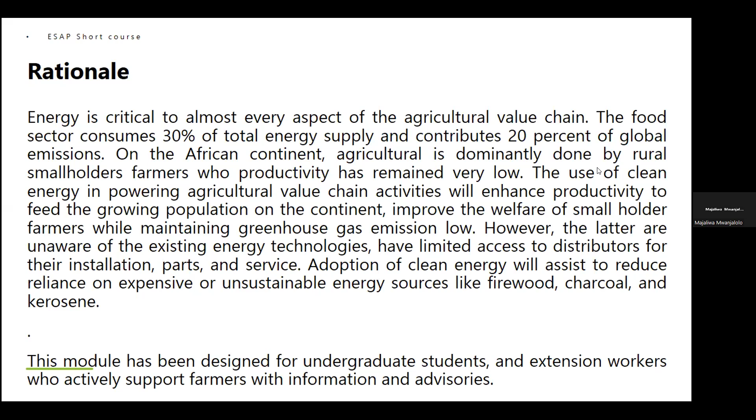undergraduate students, but also an extension workers who actively support farmers with information and advisories. So this particular training is supposed to assist people who are going to be trainers of undergraduate students, but also the extension, but also for those who want to learn some few things about clean energy.

So the goal is to impact microeconomies and rural communities through promotion of cost-effective clean energy options for agricultural value chain productivity. So we have 3 learning outcomes.

One is competencies in analyzing energy options in order to support farmers' decision on powering agricultural activities such as irrigation, greenhouse conditioning, food and feed processing and preservation, but also apply fundamentals, knowledge on energy generation, but also design, construct, and operationalize powering system on agricultural farm. So those are the three learning outcomes for this particular course.

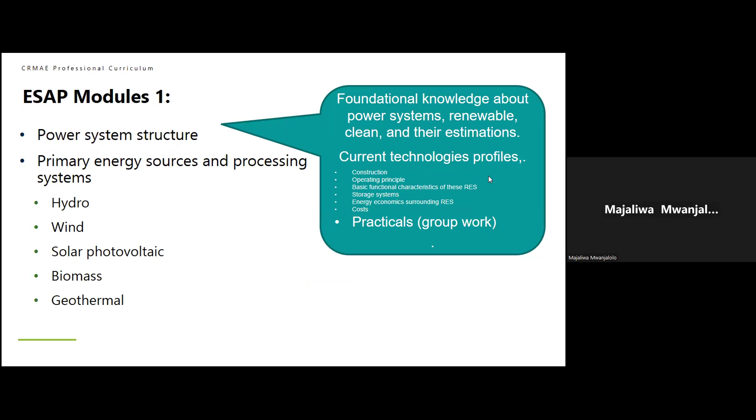So we have 5 modules under this course. The first one, module 1, will talk about power system structure, primary energy sources and processing systems, where we'll get hydropower, wind energy, solar energy, biomass, and geothermal energy.

This, in terms of competencies, we are looking at people mastering the clean energy concept, but also be able to estimate the potential of existing clean energy. In terms of mode of delivery, we are looking at lectures, field visit, and video materials for people who are going to be teaching this course.

Under module 2 on clean energy option for agricultural value chain, we'll discuss issues of inputs, production, local transport, collection, storage, handling, value-added processing, transport, logistics, and marketing and distribution, and end users. But in terms of competences, we are looking at capacity to select the best energy option in the different agricultural value chain. And in terms of mode of delivery, the teachers should be able to use lectures, field visit, and video materials.

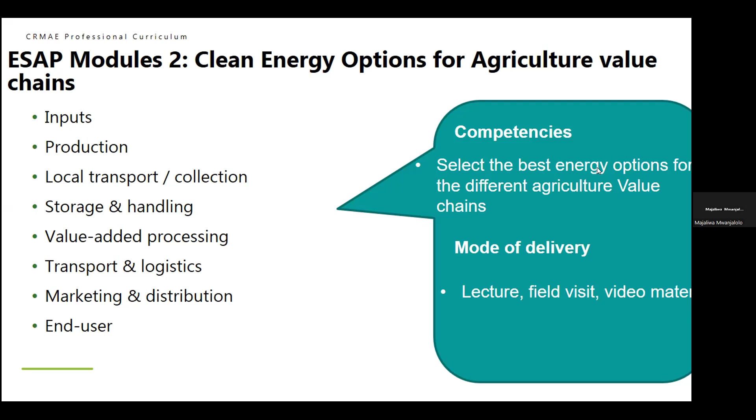In terms of module 3, which look at the energy conversion devices, we are looking at 2 particular options, they say 3: one on from one form of energy into electricity, but also for direct to alternating current, but also from alternating to direct current. But in terms of competences, again, we are looking at people who will be able to select the best conversion devices on the market, and the mode of delivery should be lectures and video materials.

Module 4 is on design and maintenance of these clean energy systems. So under this, we will discuss the design of selected power generation system, basically hydro, solar, wind, biomass, and geothermal, and biogas, but also construction of biogas system and operation principles, then storage, and then maintenance of selected clean energy on agricultural farm.

So in terms of competences, we are looking at capacity to construct selected agricultural value chain energy generation system, maintenance, how to maintain the selected agricultural value clean energy generation system, and in terms of mode of delivery, we are looking at lectures, video materials, and lab practicals.

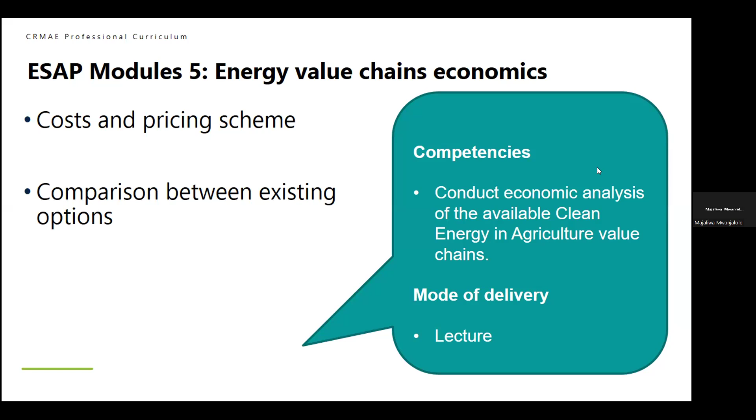In terms of delivery, we are looking at lectures. This course, if taken fully, should last 2 to 3 months. Introduction to clean energy could take 10 hours, clean energy for agricultural value chain 20 hours, energy conversion devices 5 hours, design, construction, operation and maintenance of energy generation systems in agricultural value chain 30 hours, and agricultural energy in value chain economics 10 hours.

So you observe that we have put emphasis on both the fundamentals and the practical aspect, because those two will take 50 hours out of the 75 hours this course is supposed to take.

In terms of assessment, we are looking at written tests and practical outputs for the design, construction, operation and maintenance of energy generation systems. All the rest is basically written tests.

In terms of days, we have planned that the introduction, which I'm doing, and module 1 would take 1 day, we'll see how it moves. Then energy conversion system will take day 2. The third day, the third topic will be on design, construction, operation and maintenance of energy generation systems. The fourth day will focus on the economics.

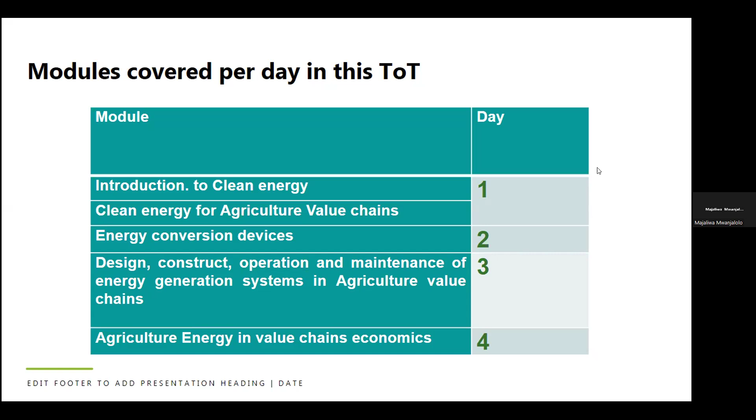We are 2 people to conduct this module: myself, Majaliwa, and my colleague Kacho Karume. I will start with clean energy and go up to the fundamentals for hydro, and then I will leave my colleague Karume to move to the next.

As I said before, the energy systems we have across the world have been designed in a conventional way as centralized power generation systems. So up to the 90s we had big plants to generate a lot of energy, frequently based either on fossil fuel or on hydropower, dispatching this energy to consumers based on relatively inflexible schedules.

But this required fundamental changes if we look at the environmental conditions created by some of these structures. Currently we need to reduce carbon dioxide emissions, and particularly the use of fossil fuel becomes an issue.

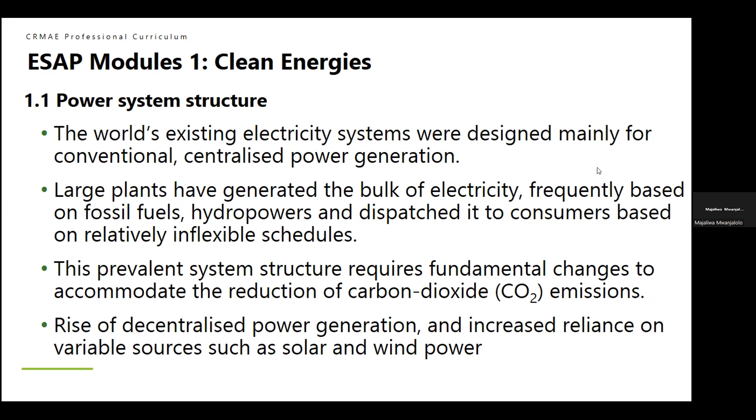As we advance into transition, under the current power system structure to the future power system structure, we need not only to identify mechanisms, but also to implement them by integrating more renewable energy generation systems. Most of the structure before were not integrating some of these renewable power systems, and they presented at that time some limitations, but some of those limitations have been resolved over time.

So we have this current power system, and we want to move into a transition. The transition means we are going into a decentralized, bidirectional system. In one case, if the barrier is still maintained, then we'll basically go into failure. But if we are looking at integration in terms of synergies, then we are likely to be more successful.

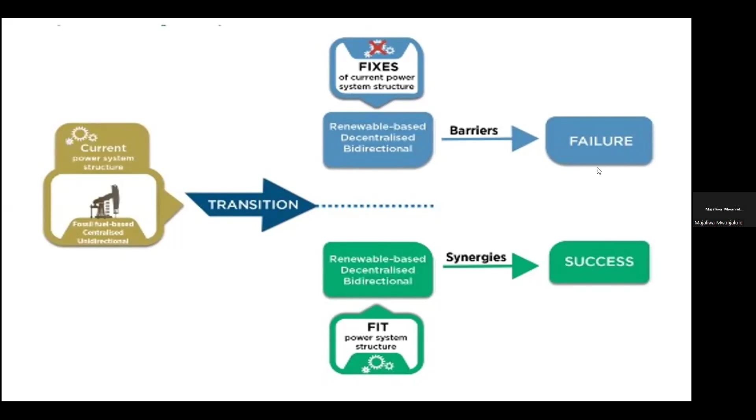If we look at the evolution of power system structure, determinants of energy systems have evolved through economics. People are looking at the economics, at the comfort the system brings. But currently it's not only economics, it's the earth system itself, it's the society people are looking at—not only the comfort people will get, but also the environmental effect of this energy system, and the availability of the system.

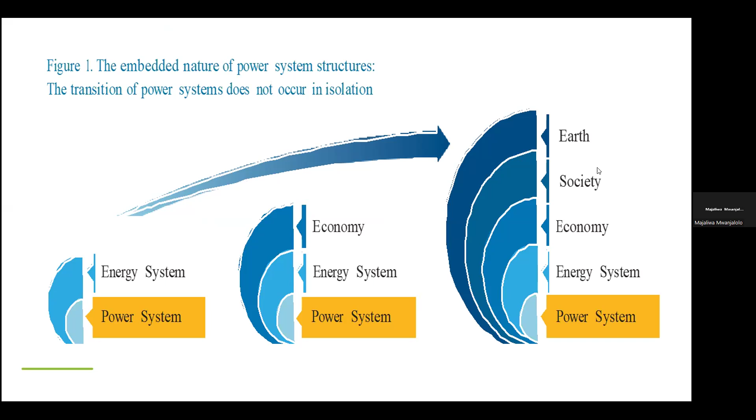So as someone teaching this course, he needs to emphasize two aspects: one, the issue of primary energy, but also the issue of secondary energy.

Primary energy, the way it is defined, is basically an energy form found in nature that has not been subjected to any human engineering. It is energy contained in raw fuel and other forms of energy, including waste, received as input to a system. Some of these can be non-renewable, some can be renewable.

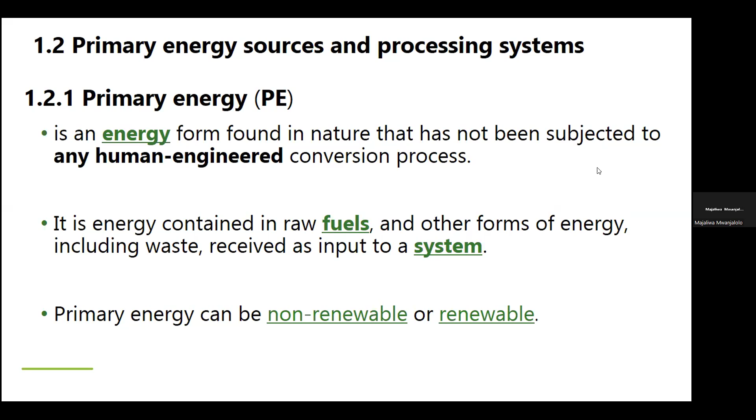The secondary energy system is a carrier of energy such as electricity. These are produced by conversion from primary energy sources. The conversion efficiency is very important because if you move from one energy form to another, you need to reduce the losses, and this can be checked using specific tools.

So you have here presented the different forms of energy. You can have nuclear, thermal, chemical, gravitational, wave, tidal, wind, mechanical, electricity, or radiation from solar.

It is easier to move, for example, from nuclear to thermal, and then from thermal into mechanical, and then through electric generators we move into electricity. The same can be done on a gravitational and hydro-tidal system, where we can easily move into mechanical if you have a rotor, and this can be converted through electric generators to get electricity.

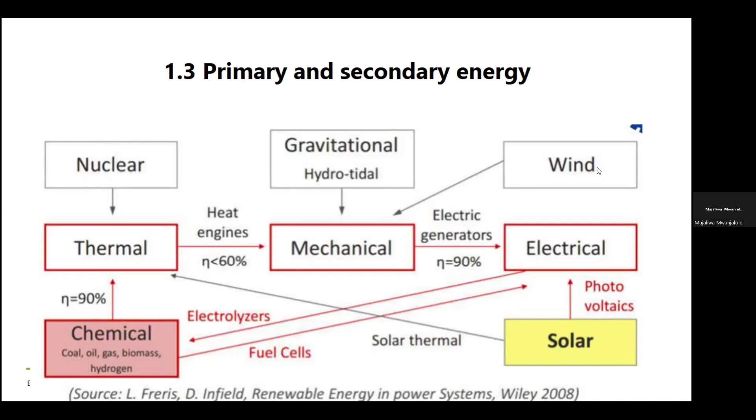So this is a very important element for a teacher to start with when introducing energy systems. So let me take you through hydropower.

Basically, for someone to teach this particular component, he needs to answer two questions: what is hydropower, and how does hydropower work?

So in simple terms, hydropower technology generates power by using elevation difference. That has been the major principle in most systems up to the 90s, and people have been building dams or diversion structures to do this. But now we know we can do it without big elevations.

So the principle is that the energy of flowing water is used to make turbines start rotating, and the rotation of the turbine generates the electricity we need. This is one of the clean, renewable, and efficient sources of energy that rely on the water cycle and gravity to power homes and industries across the world.

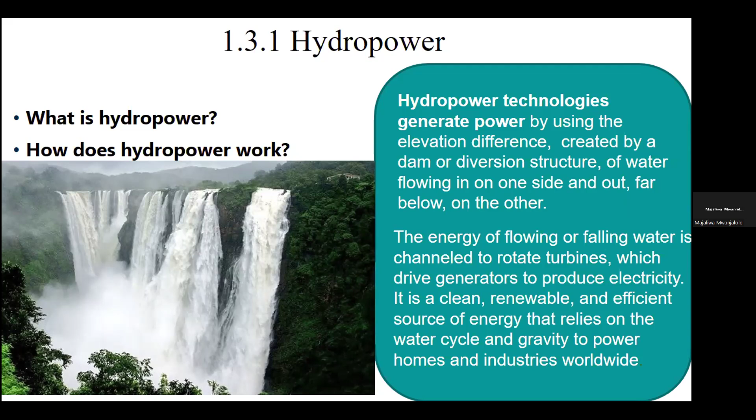And there are so many across the world. So this is one of the examples of a hydropower plant.

So we have different types of hydropower, and the different types of hydropower are based on the size, operational methods, and storage capabilities. These three factors actually determine how water is used to generate electricity and how energy production is managed.

So now we have number one: this is an example of a hydropower near our town, Ruzizi, across between DRC and Rwanda. This is an impoundment hydropower, what we call a reservoir-based hydropower, built based on a dam to store water in a reservoir, and electricity is generated through the height or elevation difference through the turbines. We have, in this case, so many of these examples.

For example, in Ethiopia we have the Grand Ethiopian Renaissance Dam, and then we have Aswan High Dam in Egypt, but there are so many other dams across the continent built based on this particular principle. The advantage of this is reliable power generation and multiple purpose reservoirs, but it also has disadvantages, including high construction cost and environmental and social impact.

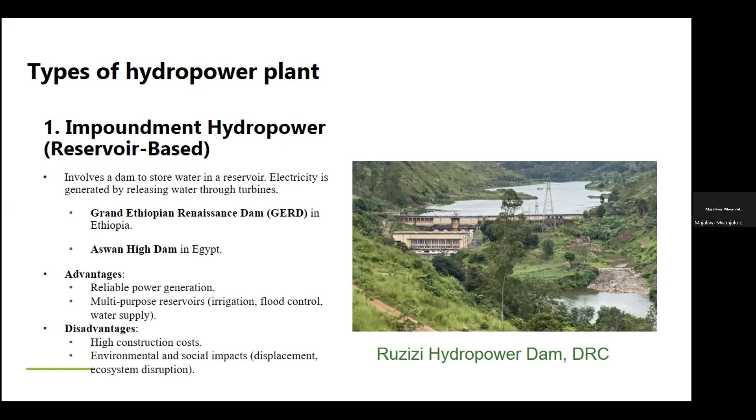As we talk about this, people need to know the principle of a given hydropower, its advantages and disadvantages, because these are going to be the criteria for selection, in addition to the three other factors we listed before. Then we have a run-of-river hydropower, which utilizes the natural flow of a river.

People have created diversions through a small channel or pipes to make sure the turbines are used to rotate and generate electricity. Basically these are small scale dams, or small scale hydropower plants, and you have so many of these across the continent.

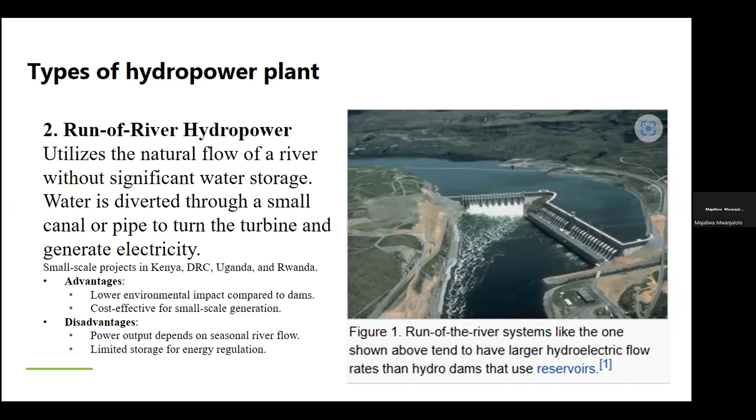The advantage of it is that, one, they have limited environmental impact compared to the big dams, and they are cost effective for small scale generation. But their disadvantage is that the flow varies with season, and there is limited storage for energy regulation.

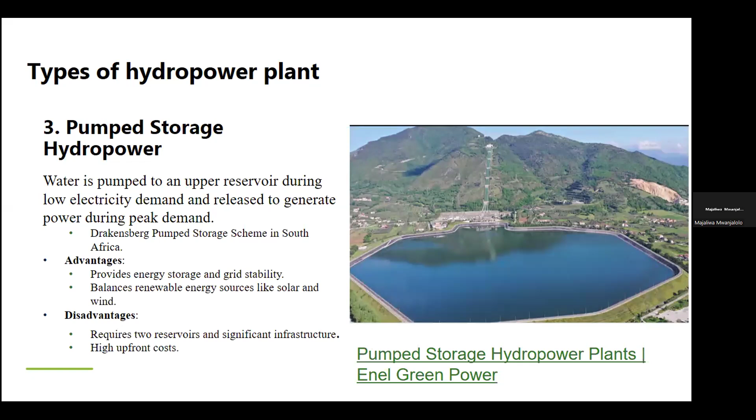The third type is pumped storage hydropower. The picture shows a big reservoir, but water is actually pumped to another place for storage and can be released when the peak demand is highest.

The advantage of this system is that it provides energy storage and grid stability, and it balances renewable energy sources like solar and wind. But the disadvantage is that we require two reservoirs, which means a lot of investment, and you have to foot the bill to put the infrastructure together.

The fourth one is micro and small hydropower. This is very important, especially for agricultural systems, and it requires minimum infrastructure.

They can be categorized into two: micro hydropower, which gives you up to a maximum of 100 kilowatts, and small hydropower, which gives you between 100 kilowatts and 10 megawatts.

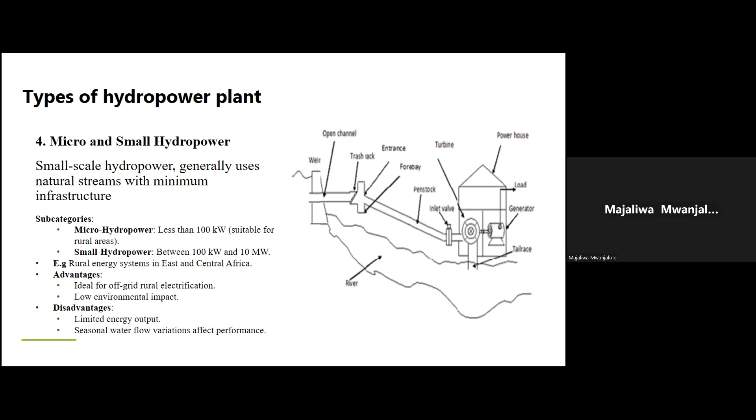The disadvantage is basically that the energy output is limited, and fluctuation due to seasonality can affect the performance of these particular systems.

Category 5 is basically in-stream hydropower, which uses the kinetic energy of the flowing river. This example shows a system where they put the turbine into the water, it rotates, and it's connected to another system outside which carries the electricity.

The advantage of this system is that we don't need too much - no dam, not too much infrastructure. We just need the turbine, we use the tidal flow and generate electricity. So there is minimum disruption to the ecosystem, but it also presents disadvantages.

The location has to be suitable, with a permanent and continuous flow, but again the energy capacity is limited.

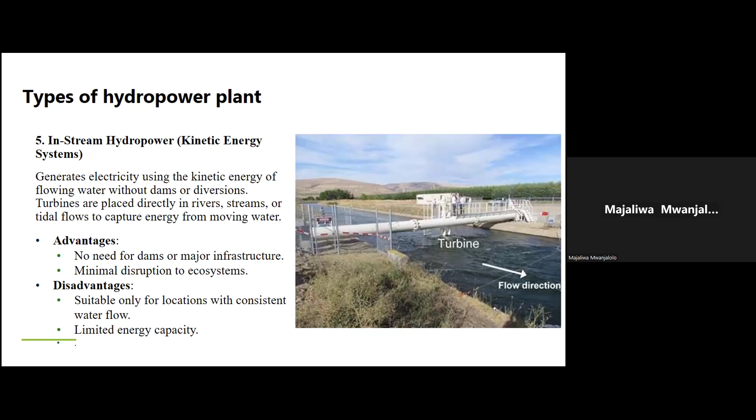So the last one is offshore and tidal hydropower. This one is used for oceans, where tidal systems are put in place which can collect the flow, the energy of the flowing water, to rotate the system and generate power.

This can also be done for waves, as water is undulating - we can capture the same energy using the same principle. The advantage here is that the energy is renewable and predictable, and we have high energy density in tidal regions. The disadvantage is that it's expensive and technologically complex.

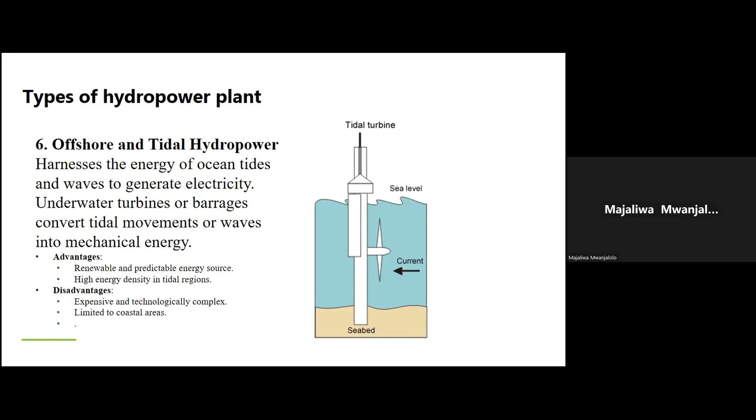There are several challenges for hydropower development on the continent. One is high capital investment cost. Two, environmental and social concerns. Then climate change, coming in as more fluctuation in rainfall and change in land use affecting the runoff in different streams, and prolonged drought also affecting the flow of different streams.

There's also the issue of infrastructure - hydropower needs a lot of infrastructure - but also political and institutional barriers. Some of these streams are cross-border, and you need countries to meet and agree to put a hydropower project on the river.

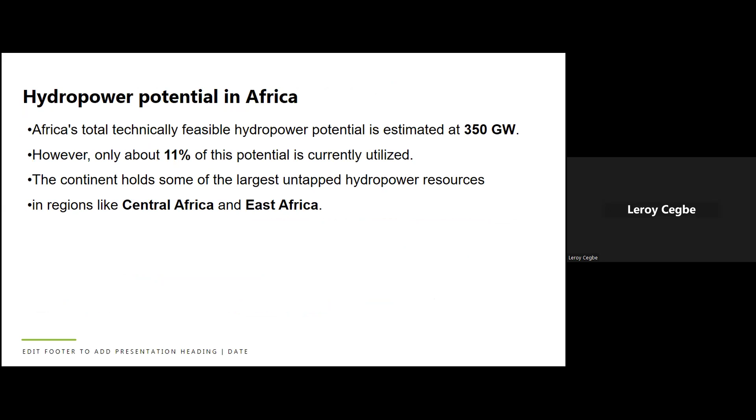So what is the potential for Africa? What are you going to do? Can Katcho assist us to close some of those people? Katcho, can you close everyone, please?

Africa has a lot of potential in terms of hydropower. It is estimated at 350 gigawatts, but only 11% of this potential is currently in use.

The continent has among the biggest dams in the world, but some of these dams are not fully used. We can find them in Central Africa, we have them in East Africa, but they are not optimized - we are not using them fully.

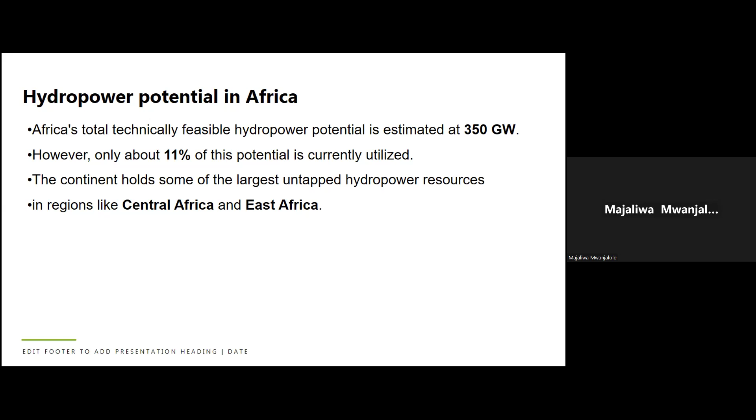In Central Africa, for example, on the Congo River, we have the Inga Dam with a potential of 40 gigawatts. We have in Uganda several dams on the Nile, also in Tanzania and Kenya. We have a big dam in Ethiopia, the Grand Ethiopian Renaissance Dam, with 6.45 gigawatts upon completion.

We also have in West Africa the Niger River Basin, and in Ghana the Akosombo Dam, with a potential of 1 gigawatt of electricity. In Southern Africa, we have Zambia, Mozambique, Angola, and Zimbabwe, with the Zambezi River playing a critical role - the Kariba Dam on the Zambezi supplies electricity for Zambia and Zimbabwe. In North Africa, we have Egypt's Aswan High Dam.

So this map here shows you the distribution of the different hydropower dams across the continent. We can actually see a concentration around the East African region, but also around the central and western coast of Africa. We have very limited dams in North Africa and in Southern Africa.

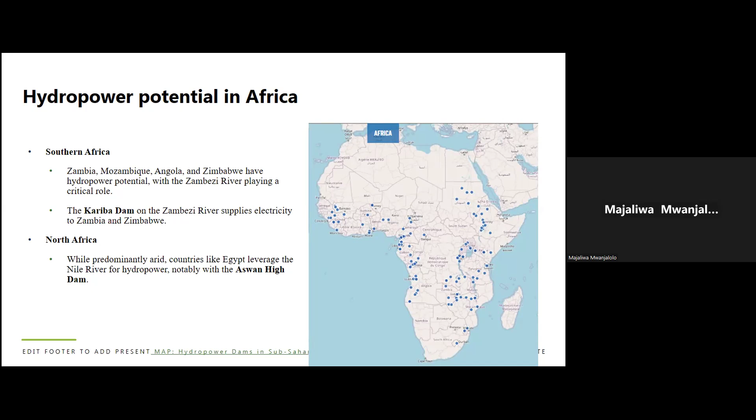But then the question is, how do we integrate some of these to actually resolve the issue of power on the continent. There are several ways of making estimation, but here I'm putting it based on the key principle: energy is equal to power times time. So if you want to get power, you need to get energy over time. The power can be estimated using the system efficiency, the density of the water, the gravitational acceleration, the flow of the water, and the head, or the difference in elevation.

So that is in terms of hydropower. So I want to request Prof. Karume, do you want to go into the wind, or you want to start from the soil? Yes, what I can say is, when it comes to hydropower, we should develop, as mentioned in the course, a way of simply estimating the flow as well as the height.

For the flow, we have developed two different methods. When the flowing water is not too big, someone can use the bucket method, which is very simple. You estimate the time it takes for a bucket to fill, knowing the volume of the bucket.

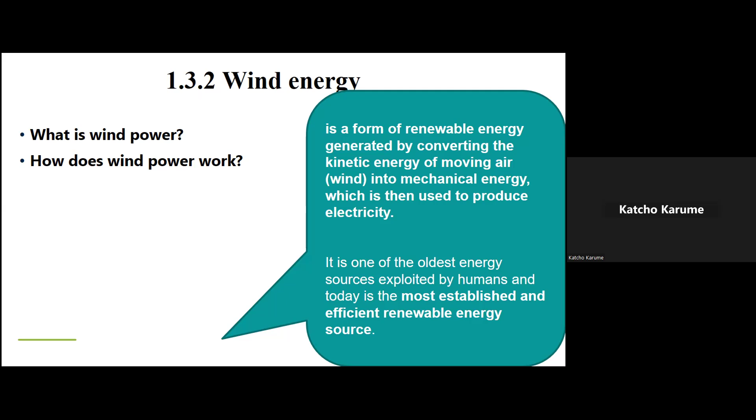According to different designs, you can have uneven blades or even blades. Each of these can have advantages as well as disadvantages. But as we are going to see later on in the course, people suggest using an uneven number of blades for stability reasons, because when you have an even number of blades, the stability is not very well.

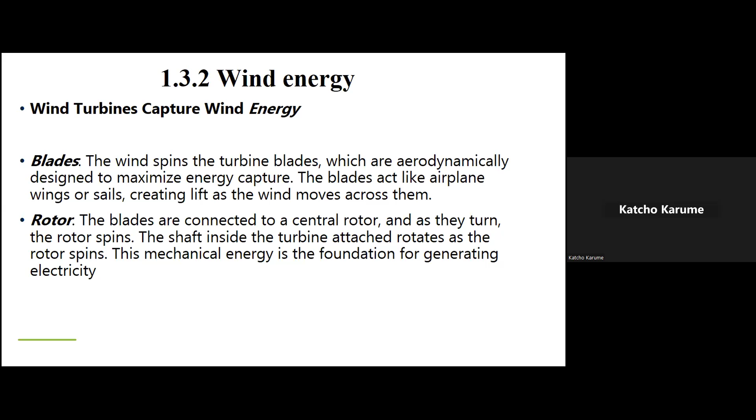So when you have these blades, they are connected to a rotor with a turbine. The mechanical energy from the blade is converted to rotation by the turbine, and the turbine, through a rotor, is linked to a generator. The generator is the one to produce energy. So at the end of the day, we have a rotating movement, which is linked to a generator, and the generator can produce energy.

It can be either direct current or alternating current. Whatever the case, if your system is using direct current or alternating current, it will be possible to convert each to another one - that one we'll handle tomorrow. So the generator, at the end of the day, will produce electricity, which will be used on the farm or in the village for people to power their systems.

And generally, when you are talking about wind energy, we have two big systems of wind: the first one is horizontal axis wind turbine, and the other one is vertical axis wind turbine.

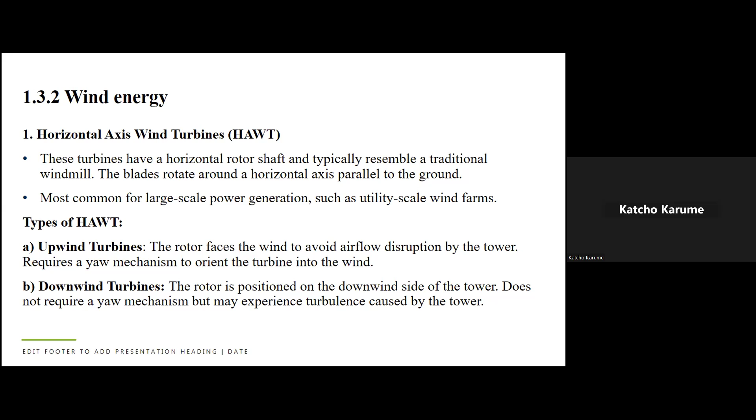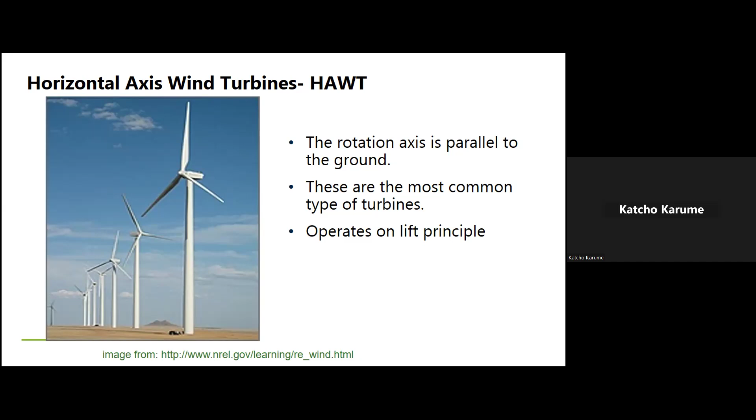I'm wondering if I have to go in details through those different types of wind turbine, or just cover it, because the details can be found in the text available on the Profaron platform. But we can just emphasize the horizontal axis wind turbine: the axis is parallel to the ground, while for the other system, the axis will be vertical or perpendicular to the ground. The horizontal axis wind turbine is the most common for large scale power generation systems, and when it comes to small generation, people are using vertical axis.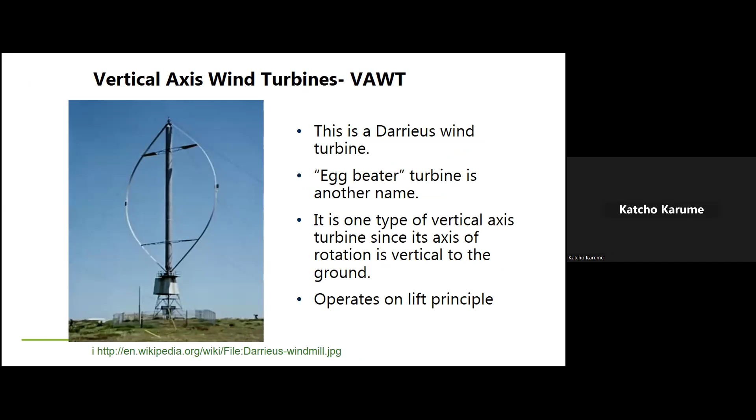We have different types of horizontal axis wind turbines, and I don't think I will go through those different systems. But let me quickly go through the advantages and disadvantages of horizontal axis and vertical axis wind turbines.

What we can emphasize on is mainly advantages and disadvantages. What are the advantages of wind energy? The main advantage of wind energy is the fact that it's a clean energy. Remember when Professor Majaliwa was introducing the fundamentals of energy, we said we have two types of energy: renewable energy and non-renewable energy. Wind energy is among renewable energy. It is a cost-effective type of energy.

It's a cost-effective type of energy. You can easily harness it as a technology, and it is cheap, and it can give work to different people. Those are mainly the advantages of this type of energy.

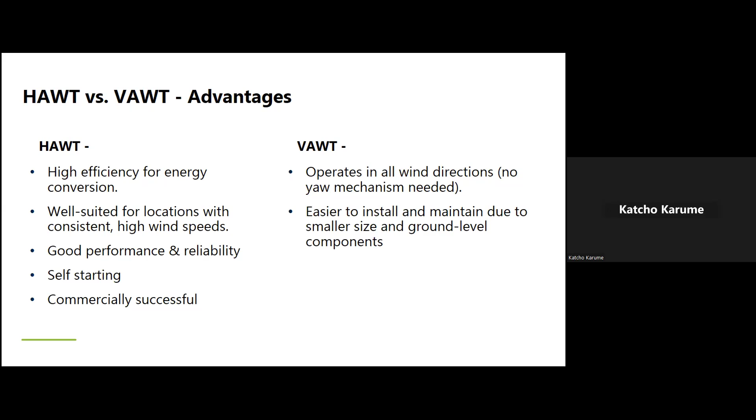So, what of the disadvantages of the turbine? One of the disadvantages of wind turbines for energy production is that you don't have wind all the time. And at the end of the day, to cover that disadvantage, people require to use a hybrid system, connecting solar and wind turbine. We will see that at a later stage.

Secondly, you need a big land, because to have a plant, you need a big land. And at the end of the day, when you come to the cost, it becomes very costly when you see the opportunity cost of land compared to energy. For regions where the density of population is too high, it becomes very difficult to avail a big chunk of land for wind production.

Third, it can impact local biodiversity. Mainly, birds can be killed by the rotating blades, because as they are rotating at high speed, birds don't realize that it's a moving object, and they get killed.

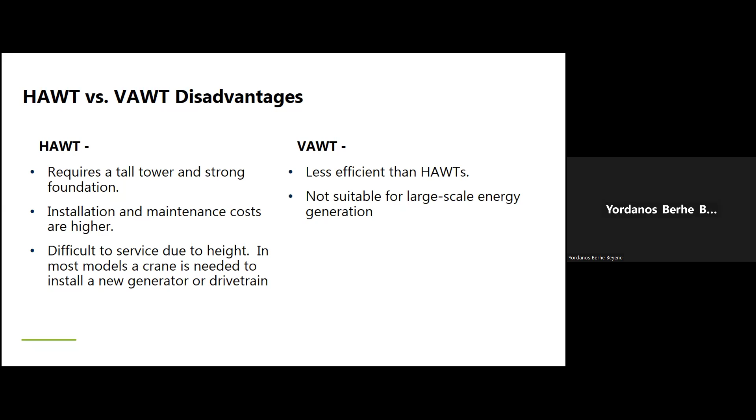Okay, Katcho, can you assist us to close people? Go ahead, Prof. Okay. The other disadvantage of wind energy is that sometimes it can create noise. With technology advancement, people have been able to reduce the level of noise.

And we can see that there is a big potential of wind energy in Africa. Currently in Africa, you can find about 83 installed wind farms, and more than 140 projects planned for wind energy production across Africa. We think in the coming years, Africa will be able to generate a big amount of energy, covering about 2% of energy produced on the continent. The target is to produce something around 300 gigawatts by 2030. And I think people will meet that target.

You can mainly find this potential in Angola, Chad, Mali, Ghana, Sudan, Niger, Madagascar, Zambia, and other countries like Malawi, and so on. When estimating the potential of wind energy, you need the wind speed coming in. To be able to produce wind energy, you need enough wind speed so that you can get more energy generated.

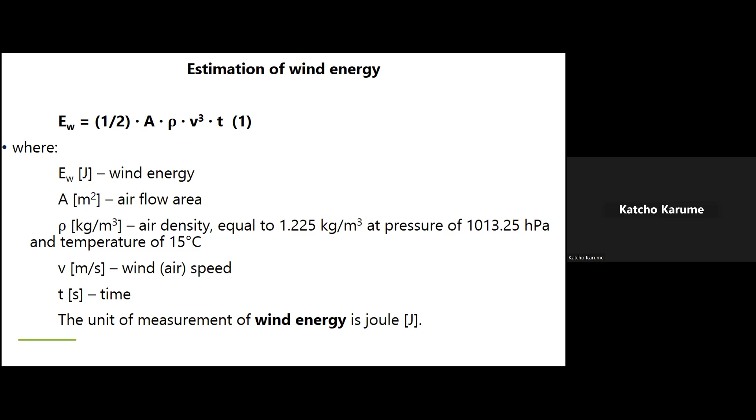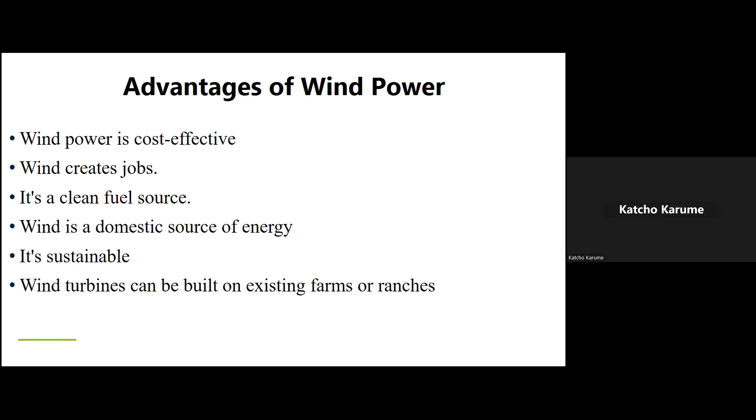Advantages of wind power: it is cost effective. It can create jobs, because when mounting the system, you can employ hundreds of people to make it work. It is a clean fuel source, because no carbon dioxide or methane is emitted. Wind is a domestic source of energy, and it can be sustainable. It can be built on a farm or on existing ranch land. Those are some advantages of wind power.

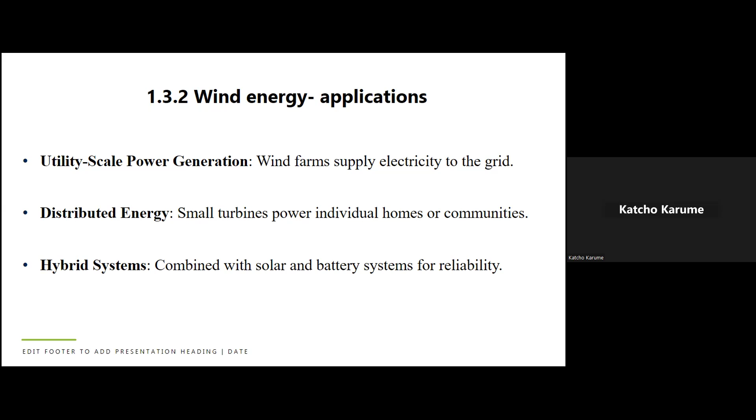Given that wind speed is not constant over time, people have developed hybrid systems, which combine wind and solar at the same time. For instance, during daytime solar is very good, so you use a solar panel to charge batteries, and during evening time, when solar has gone down, you use wind, because at most sites wind is very good during evening and night time, while solar is very good during the day. So a hybrid system can be well integrated, because at the end of the day you use the same batteries, charging them using solar energy and also using wind energy.

That is the hybrid system. Now, what are the challenges of wind power? Wind power must compete with conventional generation sources. When I talk about generation sources, I mean especially hydropower, whose cost is normally the lowest cost of energy. So currently, wind power is not yet competitive with hydropower.

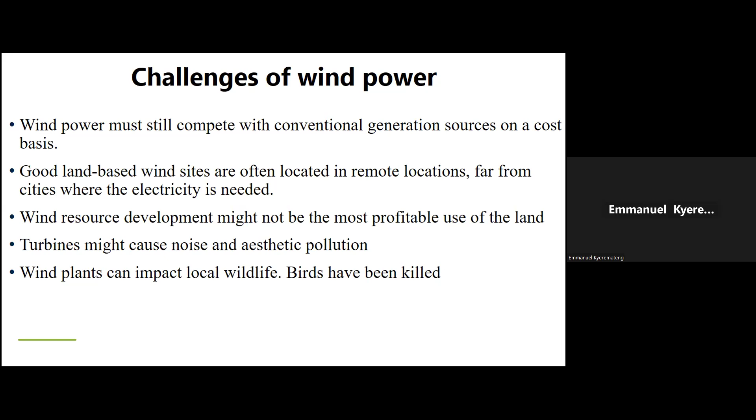Another challenge is land. People need a big amount of land, and sometimes it competes with the price of land for building or for other business. So people have to compute the opportunity cost of the land when using it for energy production versus other business. Wind resource development might not be the most profitable in some countries. For instance, in Eastern Congo, where the population density is high, it's very difficult to dedicate land for wind energy instead of for building.

Another challenge: turbines can cause noise pollution. Wind plants can impact local wildlife, mainly birds. But there is now a technology which can send birds away from wind turbines just by producing a noise harmful to birds, keeping them far away using physical principles.

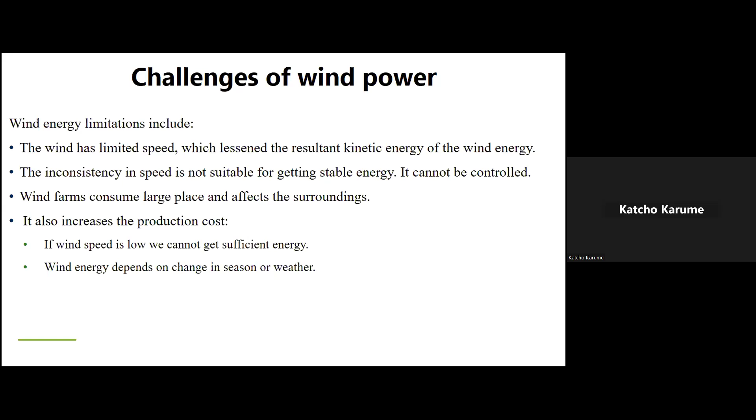Production of wind energy is also a long-term process. You cannot just wake up and say, I'll establish wind power. You need at least 3 to 6 months to make it work. It's not like a generator, where you can wake up and immediately produce energy for use. That's a big problem for wind power.

Other challenges for wind: it requires a large area, as I was saying, and it is costly. Wind production is costly compared to others, for instance hydropower or solar, which we are going to see tomorrow and go through in detail.

So I think that's what the teacher can emphasize when teaching wind energy: the advantages, the challenges, the potential to measure, and how to overcome those challenges. Majaliwa, I think I can stop there, and we can get some questions from participants. If there are no questions, we can move ahead to solar energy.

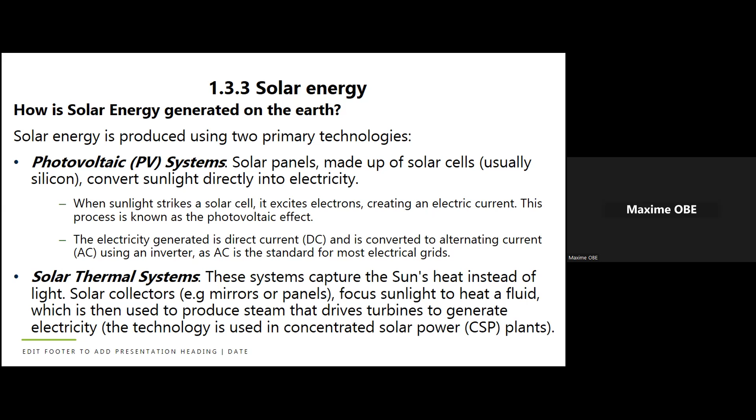The other system of producing electricity using solar energy is the solar thermal system. How does a solar thermal system work? These systems capture the sun's heat instead of light. For photovoltaic, it is light which is captured; for this one, we capture the heat. We have solar collectors which collect the heat using mirrors and other systems to focus that sunlight onto something which stores water or another liquid, to heat that water, and that water can produce steam, and the steam can drive a turbine.

And when a turbine is running, it can be connected or linked to a generator, and the generator can produce electricity, either direct current or alternating current. That is how we can produce solar energy, either by using a photovoltaic system or a solar thermal system. In one case we capture light, and in the other system we capture heat.

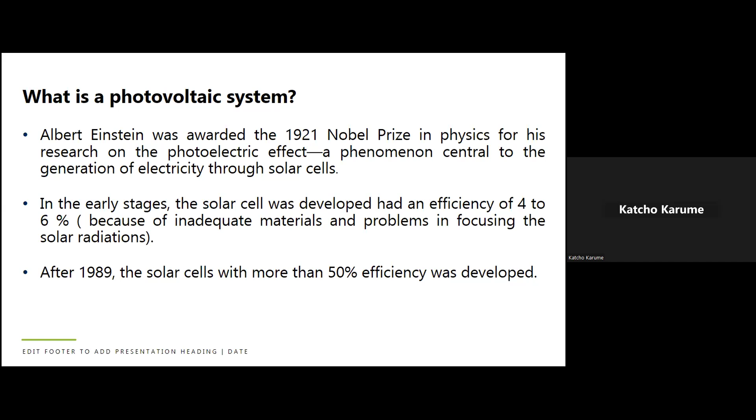So 95% of all solar cells are composed of silicon, because silicon is cheaper than germanium as a semiconductor.

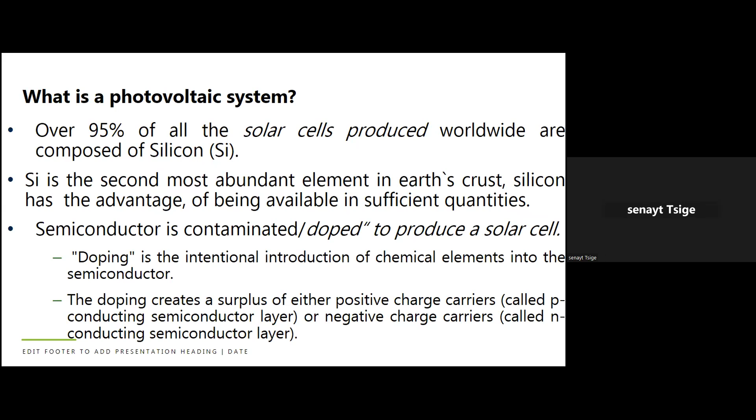So having said that, when you are mounting your solar panel, you should pay attention to one thing: you have to clean all the space around when mounting it. You have to cut trees if there are trees around, all of them, because shading part of the panel will cause problems. You have to pay attention to that, to make sure the solar panel is fully exposed.

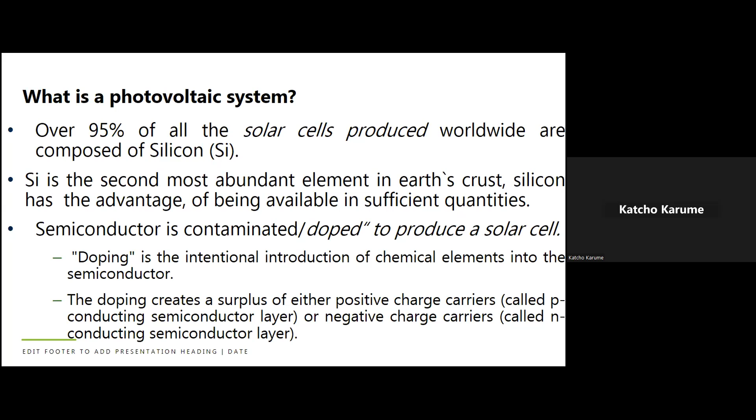The second part of the solar panel system, after converting solar energy, is using converters. Converters which convert the photo energy to direct current electricity. After the converters, we can take it to batteries, and sometimes before the batteries, you can also convert it to alternating current electricity. So this is how the solar panel system works.

The number of solar panels should be determined according to the power needs. If the power need is high, you have to increase the number of solar panels used. If the demand of energy is low, you reduce the number of solar panels, as well as the converters.

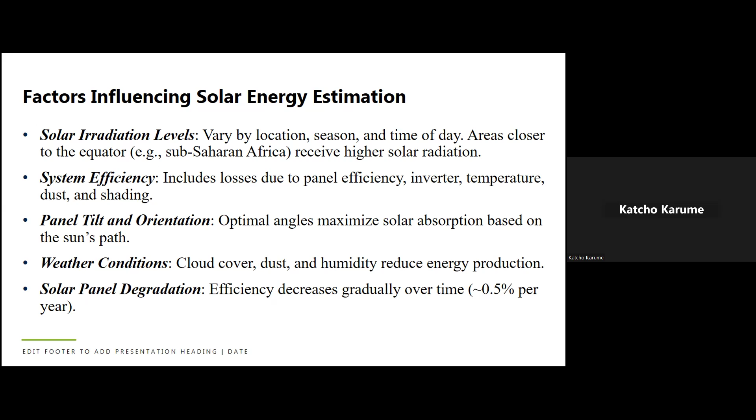Current solar energy production - today you can use solar power in different applications. Among those applications, you have simple ones and complex ones. You can use solar power for pumping water, for drying agricultural products, and so on - drying will be covered tomorrow.

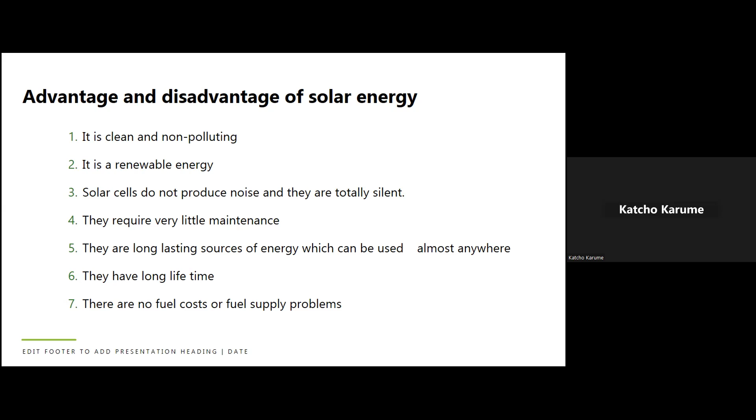And there's no need of fuel - no need to buy fuel, no need of fuel supply. So you forget about that problem of fuel supply because the only fuel you need is solar.

Now among the disadvantages of solar panels: it cannot produce a big amount of energy unless you go for a complex system which requires a big amount of land, sometimes 50 hectares, and that can be a big problem of solar energy.

Solar power cannot be obtained during night time, and that's why there is a need for a hybrid system - you combine solar with wind so you can have power morning, day, and night. If you don't have a hybrid system, you need a big storage, which becomes costly at the end of the day. So the disadvantages include needing a large area of land when you need to produce a big amount of energy.

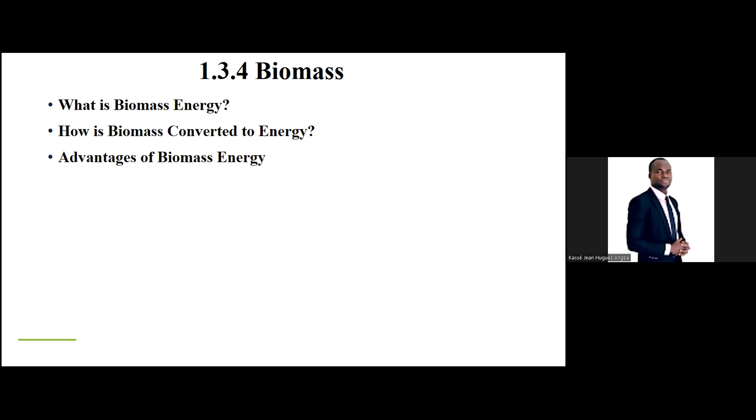Okay, so I think, is there any other question? Solar panels are now relatively cheap. The major challenge is the lifespan. I think it's just a comment. Yeah, that's a comment. And the systems and spares are now around. So there's another one.

There is an emerging concern about pollution from solar and wind components. Solar panels have a relative lifespan of 25 years, and discarded components are becoming an environmental concern. What do you have to say about this?

So the question is, the materials used for solar panels after the 25 years become a challenge, especially the silicon, because when silicon enters the water it becomes a huge problem - the water becomes very polluted, with a lot of environmental and food chain related issues.

But the other part, of course, is recycling. There are so many ways now of recycling those materials, so we don't just need to take them and leave them to go into the environment. After 25 years, we can recycle the materials and avoid that pollution taking place.

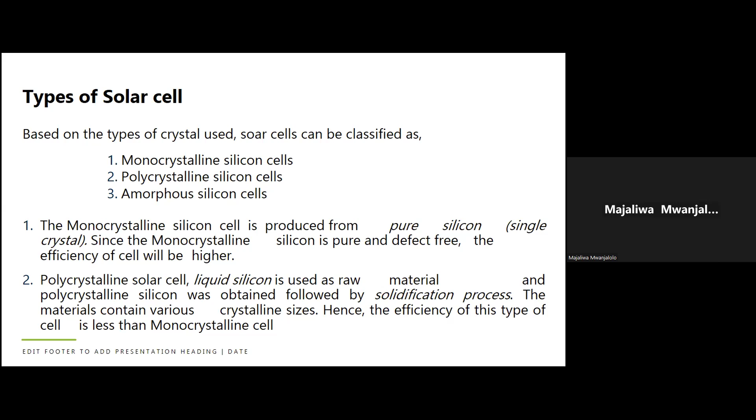If you want to get more power with solar, you need to increase the size - increase the number of panels. If you want to get more energy from wind, you need to increase the size of the wind park and put as many wind devices as needed to create the amount you require. So I think that's what we could say: a joule created from one source is the same as a joule created from another.

In addition, remember we have seen that there are about 5 types of renewable energies - hydro, solar, biomass, geothermal, and wind. On a farm, it is rare to find all 5 different types of energy available.

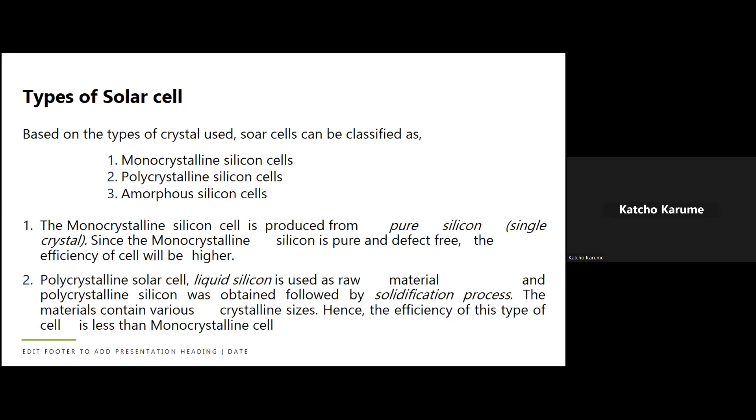So what the student or the extension worker will do, when you arrive on the farm, you have first of all to see what energy is available on the farm. If you have hydropower, solar, and wind, you need to see which energy has the highest potential. But you don't stop at the highest potential alone; you also have to consider maintenance cost, installation cost, and all the economics around that. That will be covered - how you can compare and make a choice of which energy to choose. As Majaliwa pointed out, one joule produced by biomass or biogas is one joule. But you have to see which energy is available on farm, and that will be the one developed. If more than one are available, you then carry out economic analysis to choose one of them.

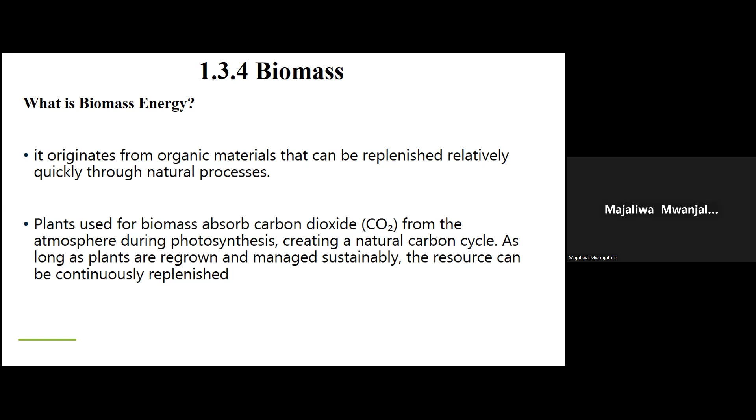So in terms of potential biomass, we have a lot of agricultural residues. We have residues from forest materials, from wood. We have residues from animal waste. We have residues from municipal and solid waste. And we also have crops which can be used for this purpose.

Now, in terms of forestry potential, we know that Africa has a lot of these forest materials, and we have several basins across the continent with sufficient amounts. In terms of livestock, we know Africa has a lot of livestock - we know what is happening in Ethiopia, Somalia, Kenya, Uganda, and other countries across the continent like Malawi and Namibia, where animals are kept. Then we also know there are crops used for energy generation.

Those coming from jatropha, from sugarcane, and other feedstocks. We also know Africa has a lot of these mega cities, and a lot of waste is being generated from those cities. So we know biomass can be renewed, and in that case it stands to be renewable energy. Though we also know that the expansion of different land uses may be a threat to this biomass, and therefore could create an issue of sustainability of some of these materials, especially from plantations and forestry systems.

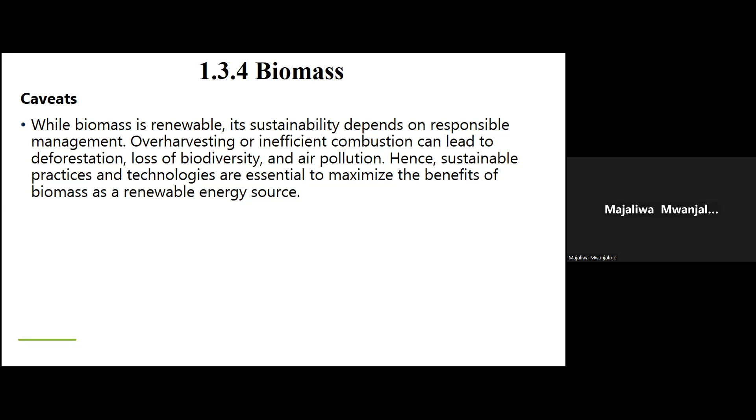So the advantage of biomass is that it is a very clean energy source. We have some degradable waste in landfills that can actually be used for this purpose. There are emissions from biomass, but in terms of their potential to create a bigger impact on greenhouse gases, we know it's very low.

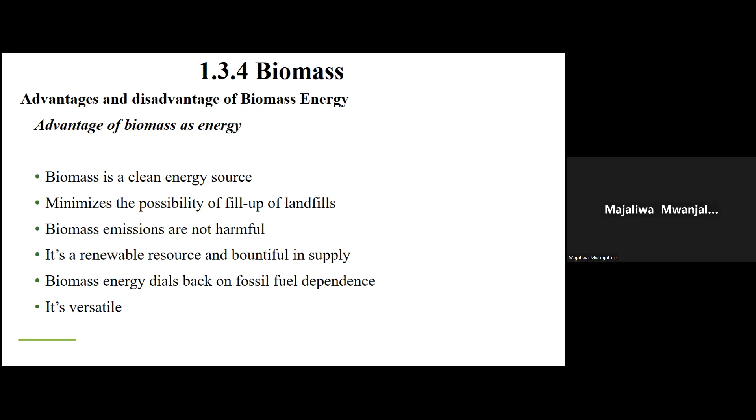If we have some of this biomass, certainly we can actually go away from some sources of energy. The biggest challenge is basically the issue of efficiency compared with other sources. The second is an issue of combustion, which requires a lot of space. And the third is the issue of degradation, either of forest materials when they are cut, which is vegetation degradation, and generating a lot of waste can also contribute to environmental degradation. So to some extent, the use of this can also have harmful effects on nature.

So now let's go to geothermal. Geothermal is basically energy originating from the heat stored within the Earth's surface. This heat can come from the Earth's surface and can be harvested as residual heat, and can be used for domestic and industrial activities.

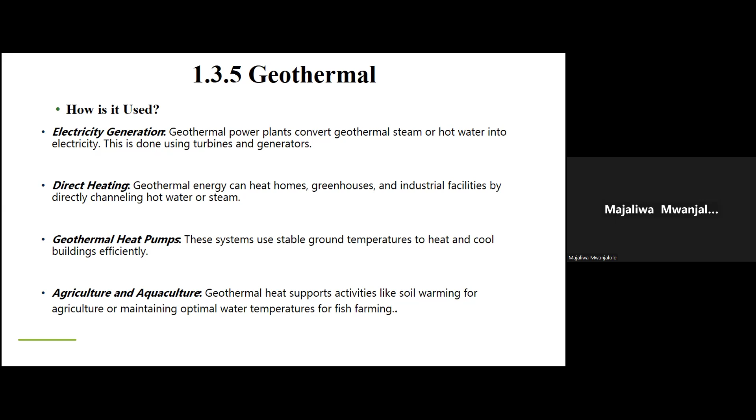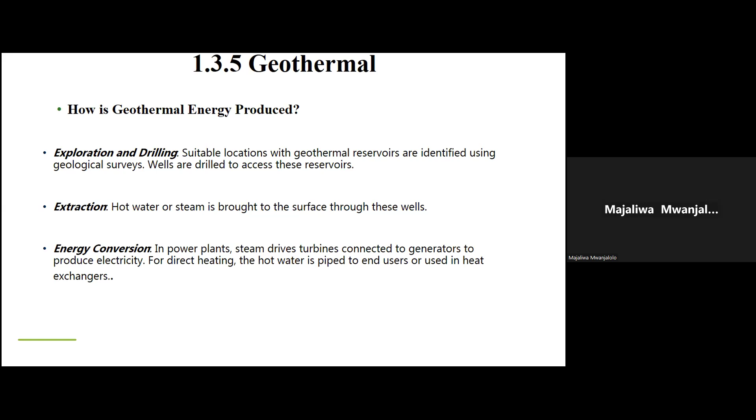There are different systems for doing it, as we'll see in the next slide. Basically, what we need is to identify the suitable areas. There are specialized techniques for doing it, to identify where we can have sufficient geothermal heat. So we can do extraction, but we can also convert the heat into electricity using a turbine.

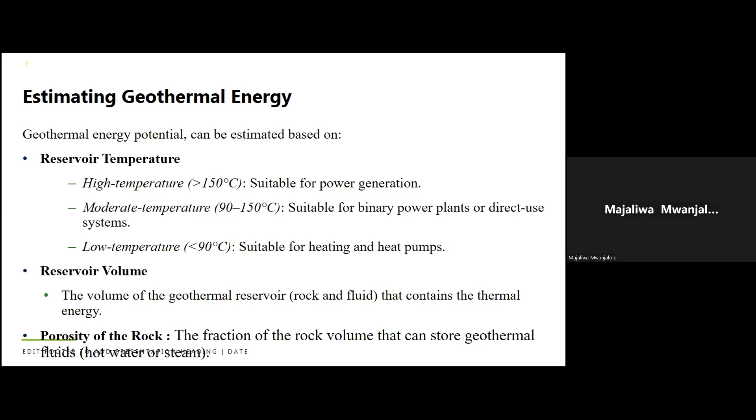The other part we need to consider is the volume of this geothermal reservoir, so how much steam we get from these geothermal systems. We also need to consider the porosity of the rocks, for the heat to come out of the soil. There are other parts to consider, because heat equals mass times the heat capacity times the change in temperature. So we need to know the heat capacity of either the material you want to put in the binary system, or of the liquid around these reservoirs.

The other aspect, Majaliwa — yes, Prof. Majaliwa? It's 4. I suggest we stop there and proceed tomorrow. No, give me some 5 minutes, we could finalize it, then we restart tomorrow.

So we need to look at the recovery factor, how much of this particular energy can be recovered over time. Then we also need to look at the thermal gradient, how the temperature changes with depth, because that will tell us something about sustainability.

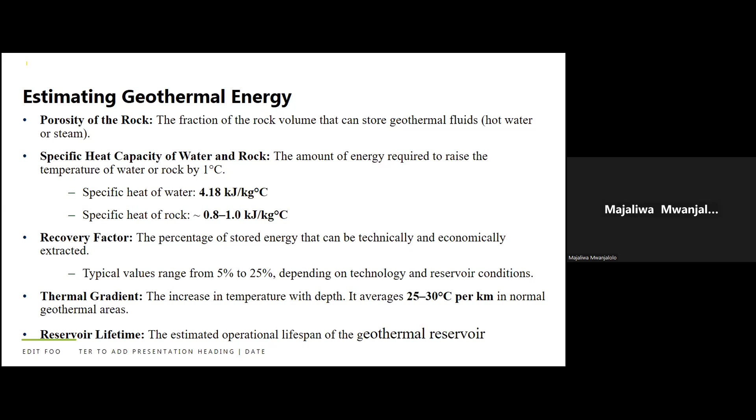And then the reservoir lifetime. For how long can we exploit this particular geothermal system? How do we estimate the heat generated?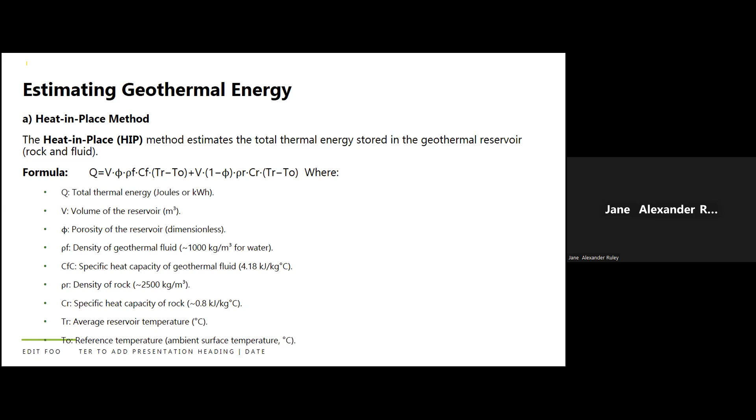This is basically one of the formulas which can be used. What is important for you to get the total thermal energy? You need to get the volume of the reservoir. We need to have an idea of the porosity of the reservoir. We need to know the density of the thermal fluid, generally very close to the density of water. Then we need the specific heat capacity of the fluid, which can also be close to that of water. The density of the rock, close to 2,500 to 2,700, and then the specific heat capacity of the rock. And then the average reservoir temperature, and then the ambient temperature. So those different factors put together will give us an estimation of the total thermal energy required.

The issue is to look also at the recovery, to see how much we can actually recover when we are using it. And basically the recovery factor doesn't go beyond 25%.

We also need to have an idea of how much power can actually be generated from that heat. And again, this will depend on the conversion efficiency. So the most important thing is to know what technology we need to use to actually convert the geothermal energy into electricity. It's rare to get systems or technologies which go beyond 20%.

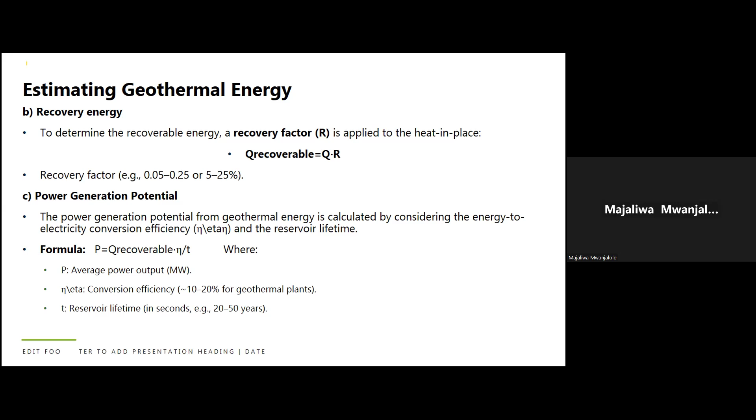And the reservoir lifetime generally is less than 50 years.

There are also simplified methods for someone to determine the thermal energy output. There are particular software which can be used, Homer, Geostar, and TOUGH2, to help make an estimation of the potential energy.

If we look at the distribution on the continent, we can see that Eastern Africa presents the highest potential of this. And then part of Morocco also has sufficient potential for geothermal. Other places have basically moderate to low potential.

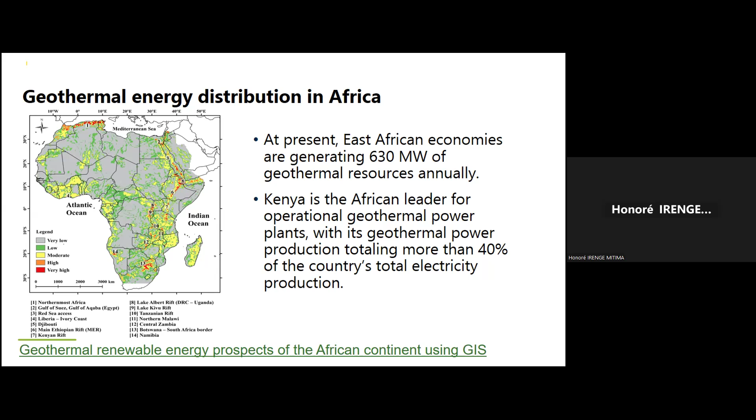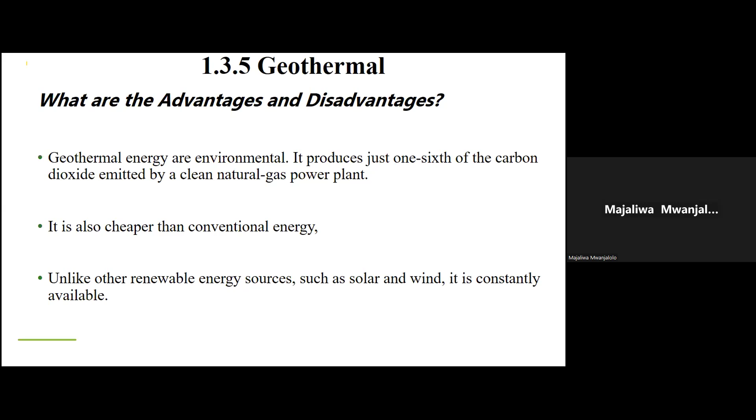What are the advantages? Generally, the emissions are very low for geothermal, though sulfur may be one of the issues coming from these systems. They are cheaper than conventional types of energy. Unlike other renewable energies like solar, it is constantly available. Compared to solar and wind, you have it generally available.

So what are the disadvantages? The geothermal plants can only be operated about 90% of the time. You have the flash and the dry steam power systems, and those emit less than fossil fuel. We need to consider nitrogen oxide and sulfur emissions. For the binary and hot dry rock plants, we don't have gaseous emission.

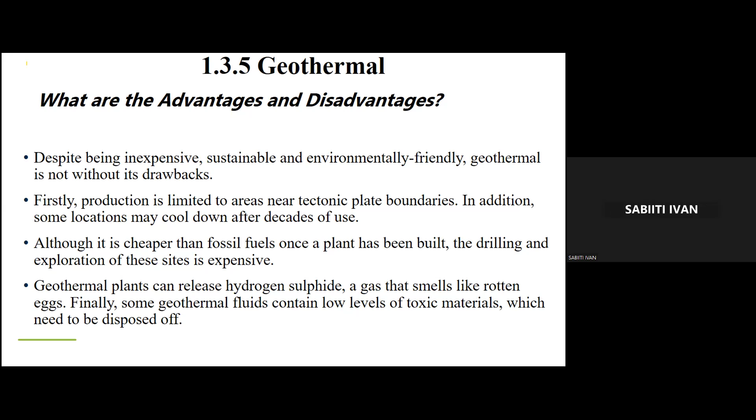And the geothermal plants do not require a lot of... So despite being inexpensive, geothermal sustainability and environmental issues need to be considered. They are generally located where we have areas of tectonic plate boundaries. They may be cheaper than fossil fuel, but it requires a lot of exploration and drilling on site, which can actually be a bit expensive. And as I said, the geothermal plants release hydrogen sulfide, and this can be a problem.

Professor, I have one question. Yeah, I'm going to finish.

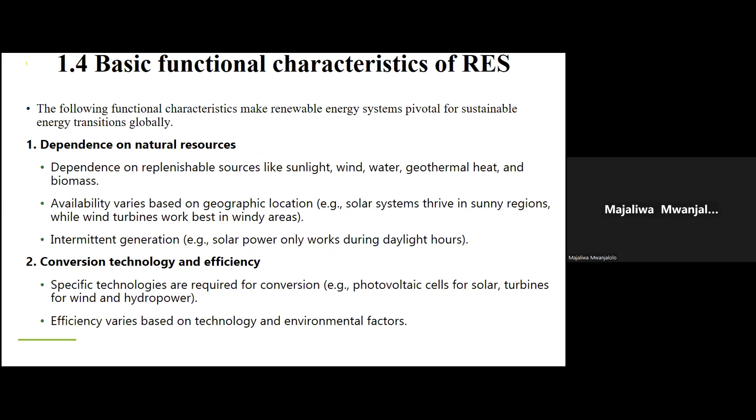So that can actually be a problem in areas where these systems are located. Basically, those are the key points for the five sources of energy we have considered. Let's leave the other one for tomorrow. But if you have questions, kindly go ahead.

Thank you, sir. I am Mr. Honoré Irenge from Evangelic University of Africa, UEA Bukavu.

My question concerns the composition of the turbine used in geothermal power plants. How to avoid the risk of nickel poisoning contained in the turbine of this geothermal power? Because if we have longer exposure, we can have what we call carcinogenic issues.

Thank you, sir. Okay. So is there any other question? Yes, we have a number in the chat.

How can we avoid the consequences of lead poisoning caused by the prolonged use of solar panels? And how can we ensure that our customers are protected?

Can you repeat that question? How can we avoid the consequences of lead poisoning caused by prolonged use of solar panels? And how can we ensure that our customers are protected?

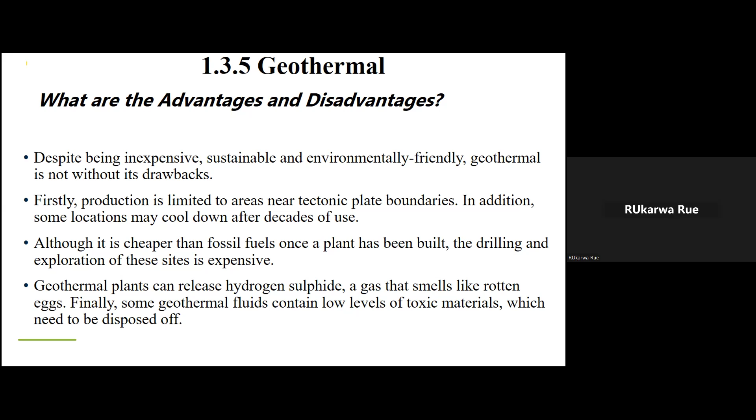Is there any other question? Yes. Let's see. I think that's the only question. Okay, that's the only question.

Yeah, if I will start with the question of Irenge.

His question was about the issue of cancer related to the use of geothermal energy. I think, Irenge, that's the question you asked? Yes, I asked how can we avoid the risk from the nickel compound, because nickel is a metal which can be... what can I say?

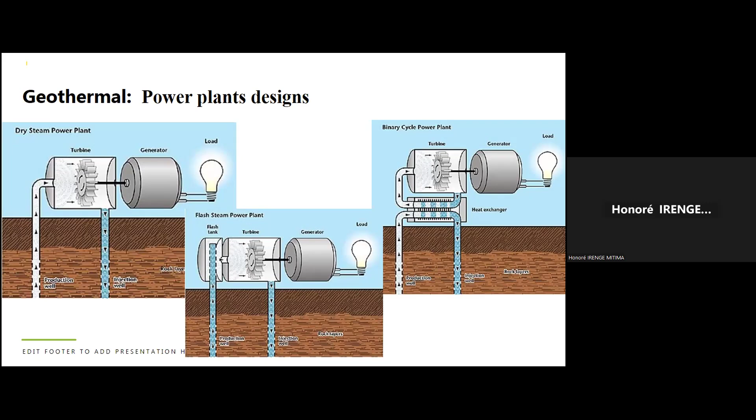So let me first answer the young man in French and then I will come back to English.